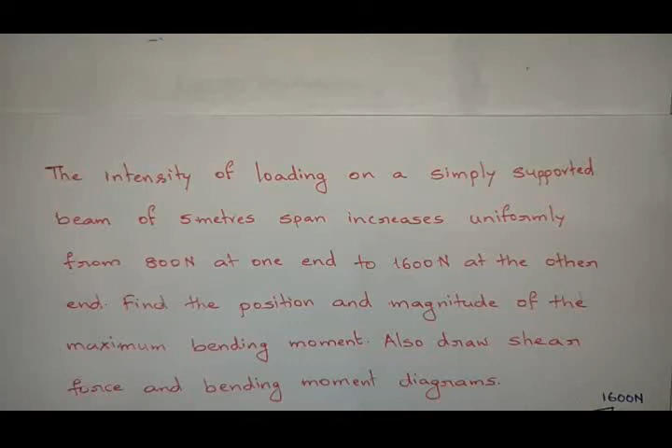Hi everyone, in this video I am going to discuss a problem on simply supported beam carrying a UDL and UVL.

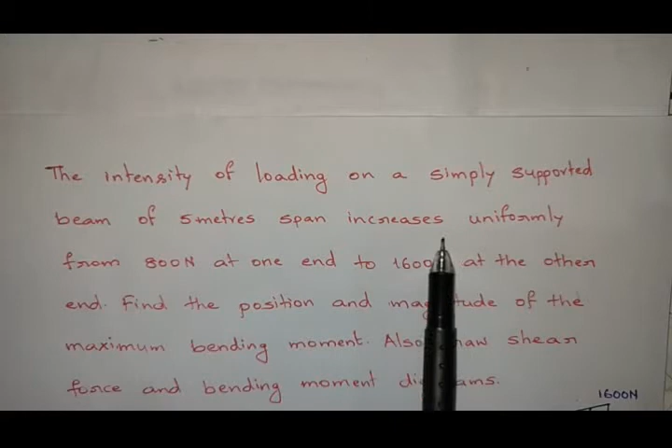The problem states: the intensity of loading on a simply supported beam of 5 meters span increases uniformly from 800 newtons at one end to 1600 newtons at the other end. Find the position and magnitude of the maximum bending moment. Also draw shear force and bending moment diagrams.

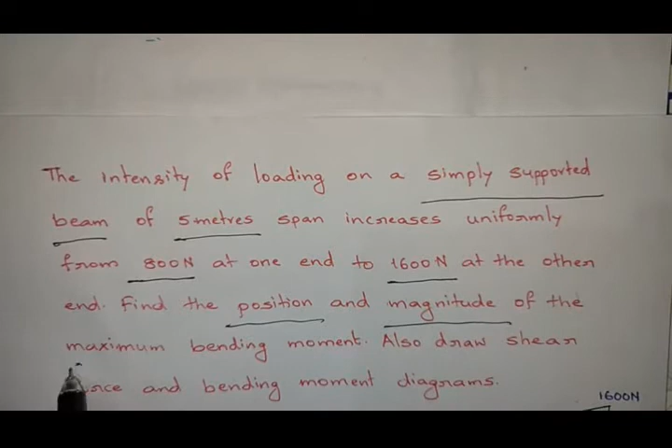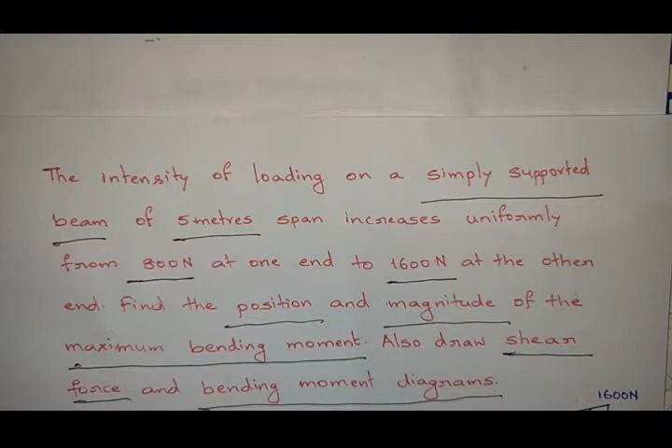Here the figure is not given, so according to that we need to draw the figure. So here I have drawn a figure, see it.

So here I have taken a simply supported beam represented in the red color. For simply supported beam two reactions are there, RA and RB.

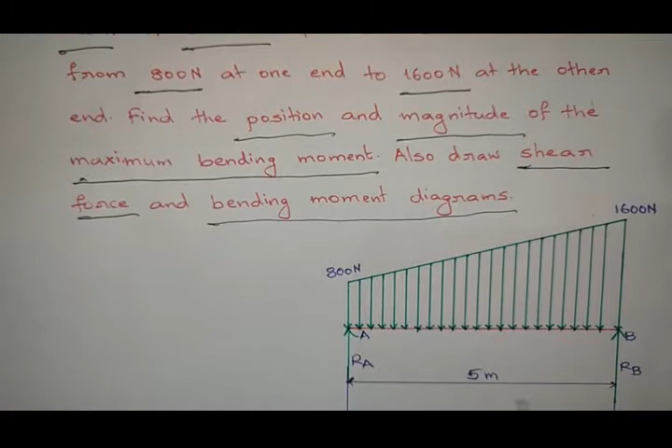The length of the beam is 5 meters. At one end, that is end A, the load is 800 newtons, and at end B it is 1600 newtons. On the left hand at one end 800 newtons and on the other end 1600 newtons of load is acting.

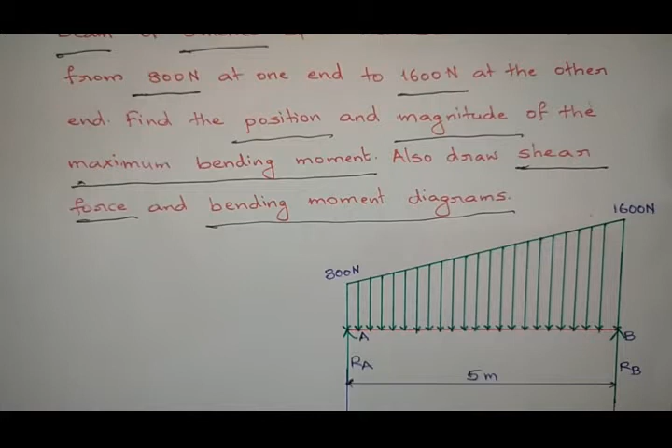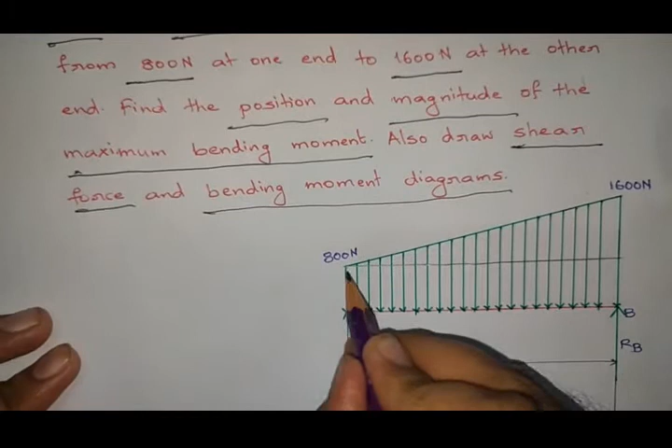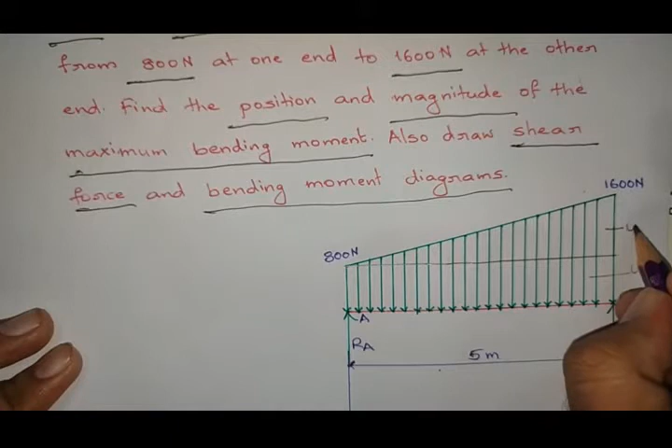Now what about this load, from here to here this portion is a UDL, and from here to here this portion is a UVL. So now the load is a combination of UDL and UVL.

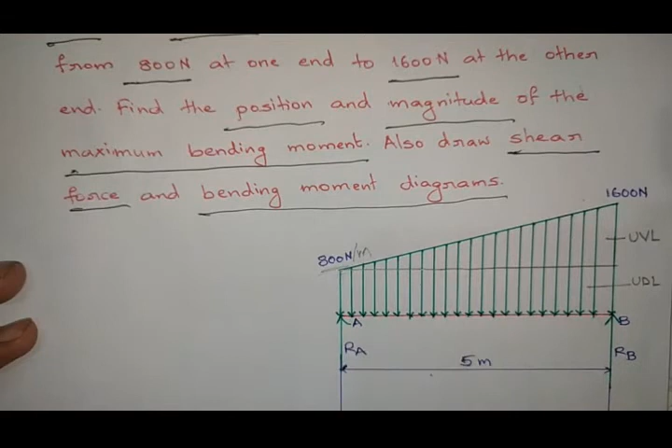So first convert UDL into a point load. What is the height of the UDL? 800 newtons per meter. That means per meter 800 newtons. For 5 meters, how much? 800 into 5, that is 4000 newtons, acting in the middle of 5 meters.

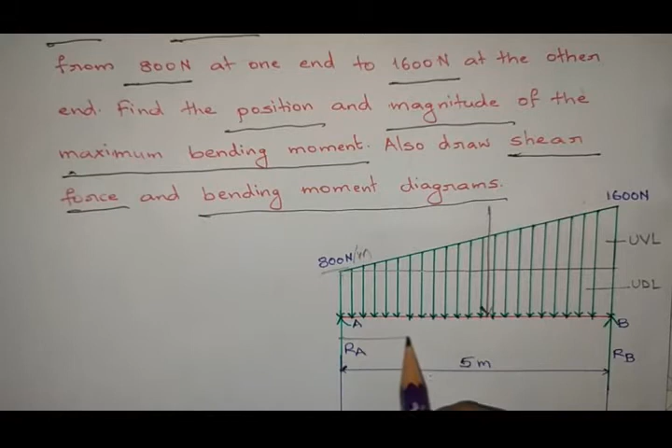This 4000 newtons acts in the middle of this 5 meters, so that is at 2.5 meters distance, and on the right side also 2.5 meters.

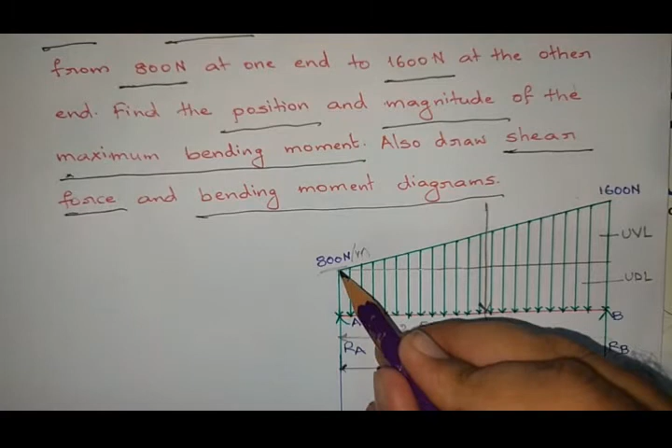Next, convert UVL into point load. Now let's convert the UVL also into a point load. On the left side the height is 0. Total is 1600, here to here is 800. Then what about this height?

800 newtons. Now what about this value? So half into base, what is base? 5 meters, into height value 800. So 400 into 5, that equals 2000 newtons.

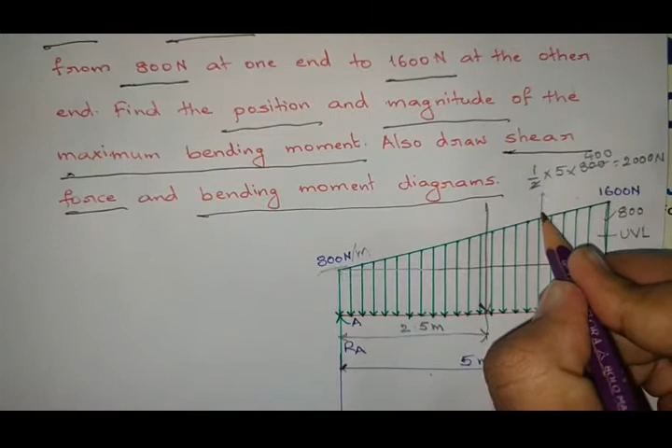So where is this 2000 newtons acting? It is acting here, at a distance of 1/3 of L. So in this 5 meters, 1/3 means 1/3 into 5, that distance from the right side it acts. So that is 5/3.

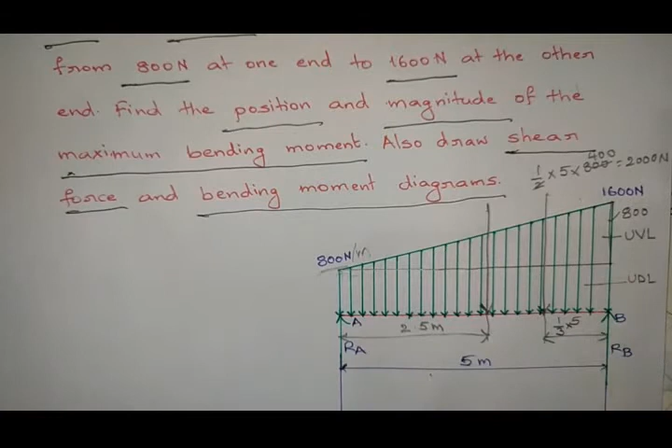So now I converted UDL into a point load, and UVL into a point load.

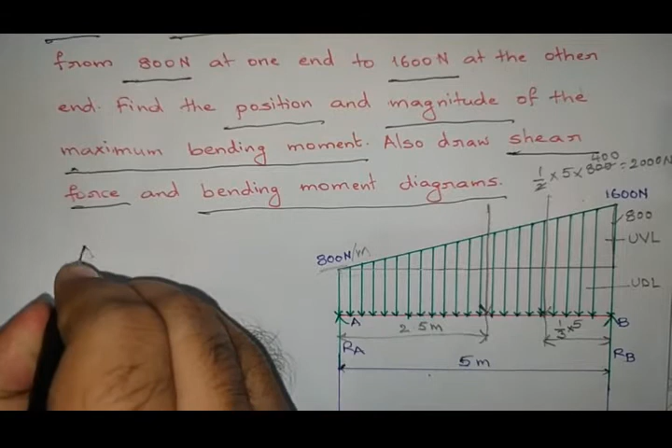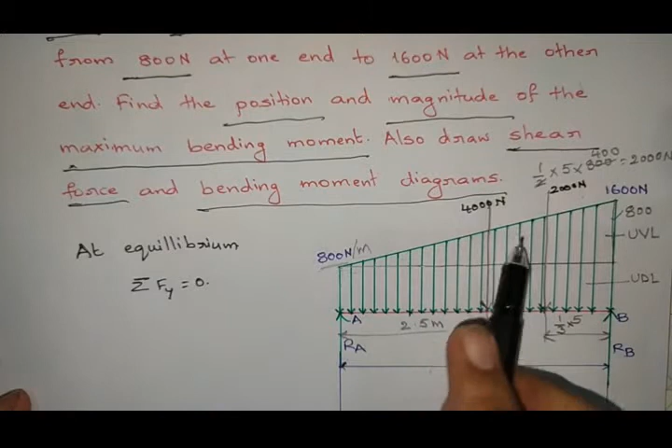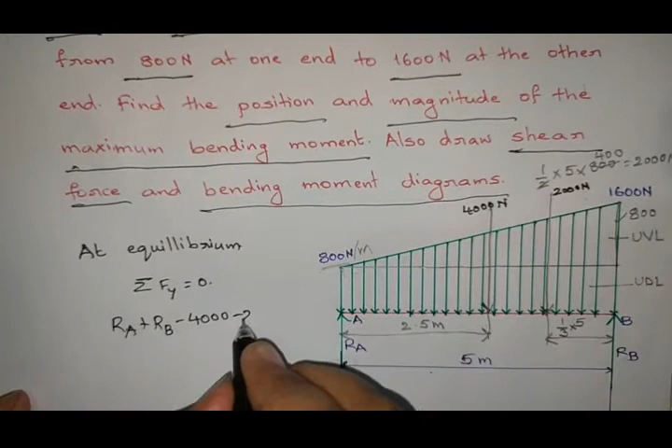So I can write RA, RB upward. Next this 4000 newtons, and this one is 2000 newtons, acting in downward direction. So RA plus RB minus 4000 minus 2000 equals 0. So RA plus RB equals 6000 newtons.

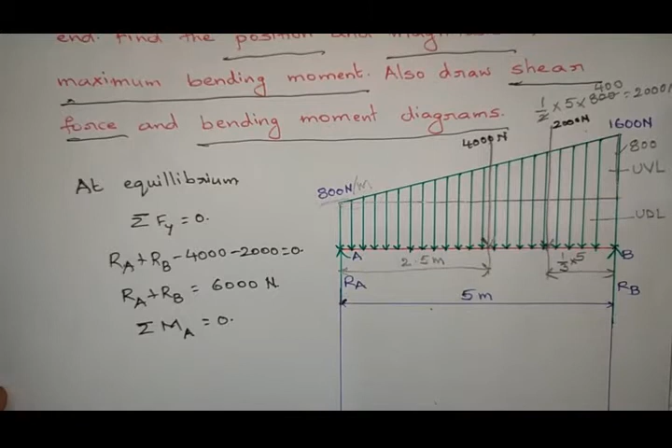Next, find the moments with respect to point A and equate it to 0. So moment due to RB into distance is RB into 5, anticlockwise moment positive.

Next, 2000 into this distance, total 5 minus 5/3, that means 10/3. So that equals 2000 into 10/3, and it is at a distance, clockwise moment minus.

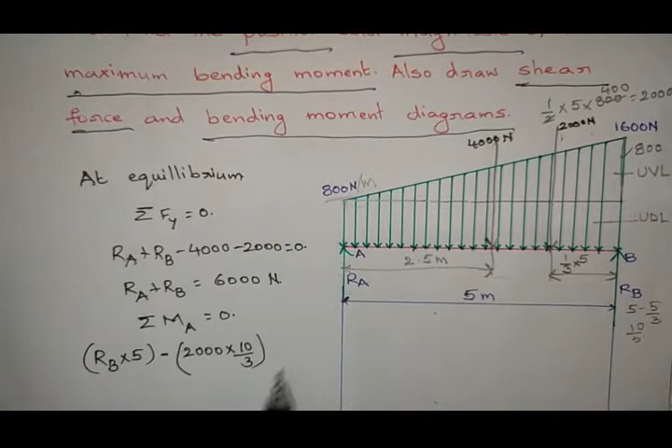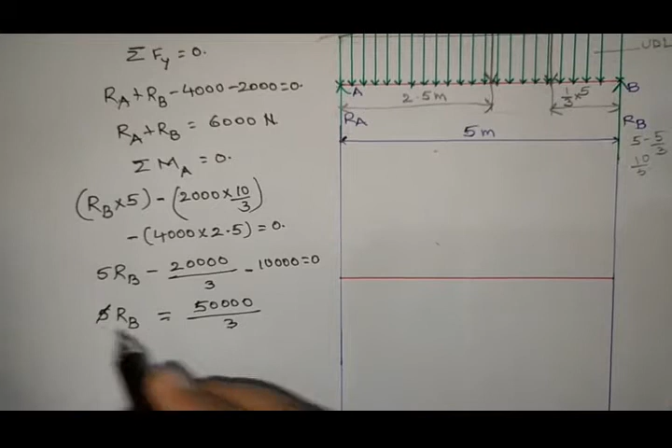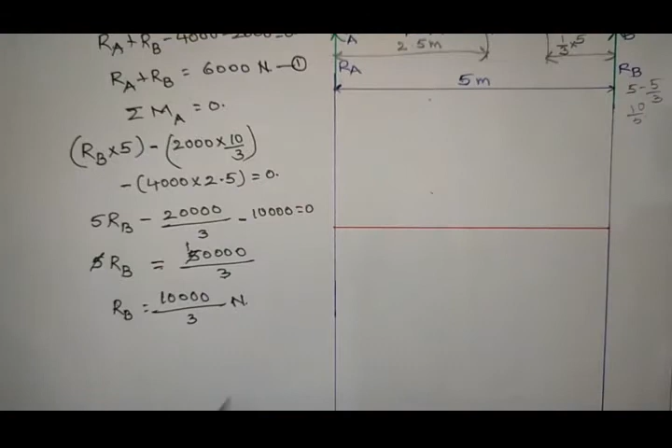Next, 4000 into 2.5 is also a clockwise moment, so minus 4000 into 2.5 equals 0. So that means 5RB minus 20,000 by 3 minus 10,000 equals 0. So 5RB equals 50,000 by 3, that equals RB equals 10,000 by 3 newtons. Now substitute RB in equation number 1. So RA equals 6000 minus 10,000 by 3, that equals 8000 by 3 newtons. So now I got RA and RB values, right?

So now calculate the shear forces. So I am going to find shear forces. Okay, so what are the shear forces values?

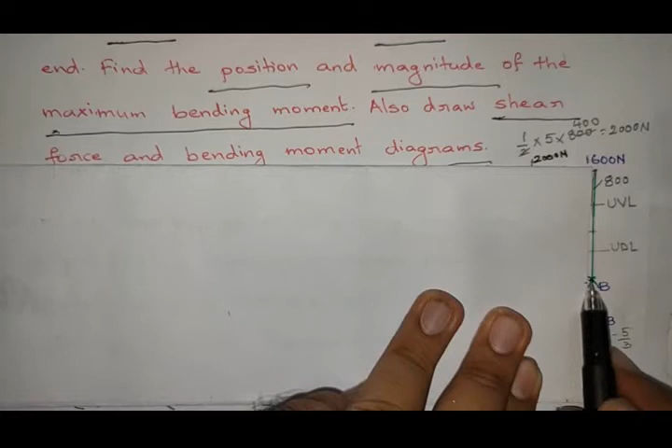Next, calculate shear force at A. So shear force at A is equals to, so what is shear force at A?

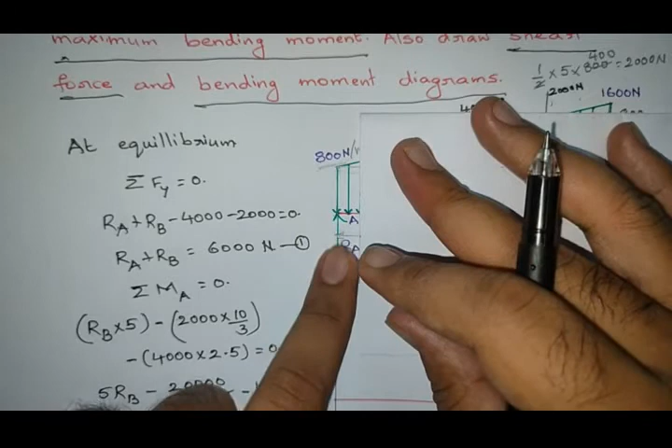So here RB is 10,000 by 3, not 8,000. RB is 10,000. Okay. Next, plus RA means 8,000 by 3 newtons.

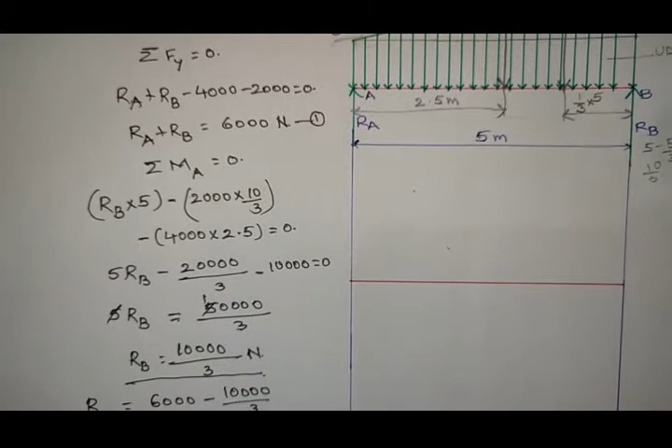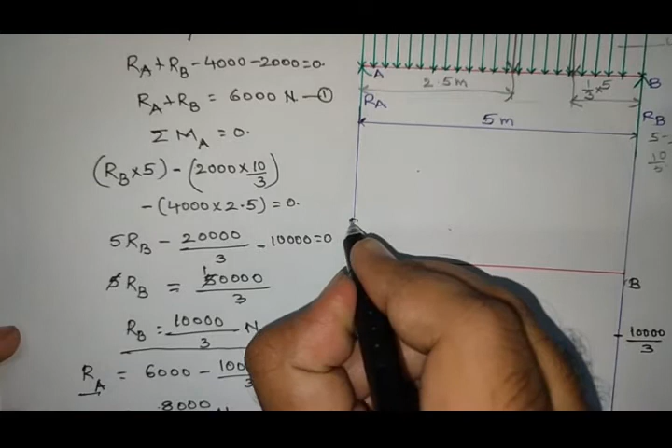Right. So now represent those values. So shear force at A and B. So shear force at B minus 10,000 by 3. So minus means below this line, 10,000 by 3. Next, shear force at A plus 8,000 by 3. So that means this value, so that is 8,000 by 3.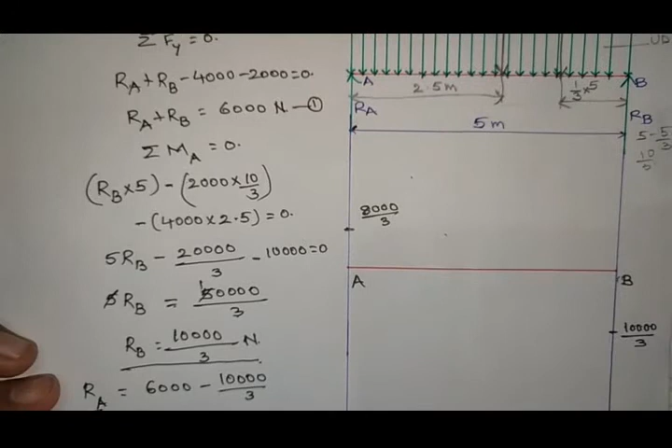Okay, so here draw a curve joining these 2 points. So it is a parabolic curve.

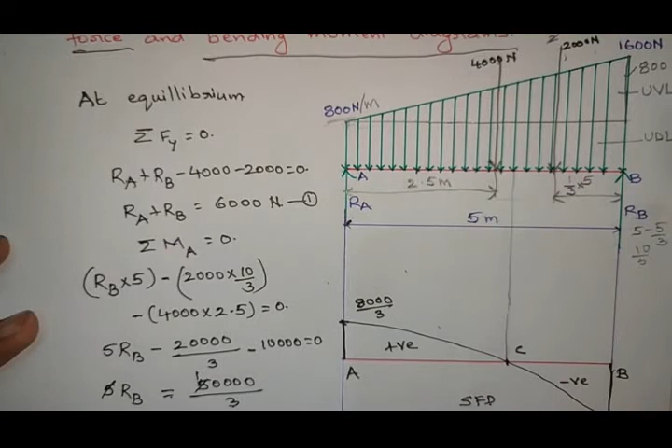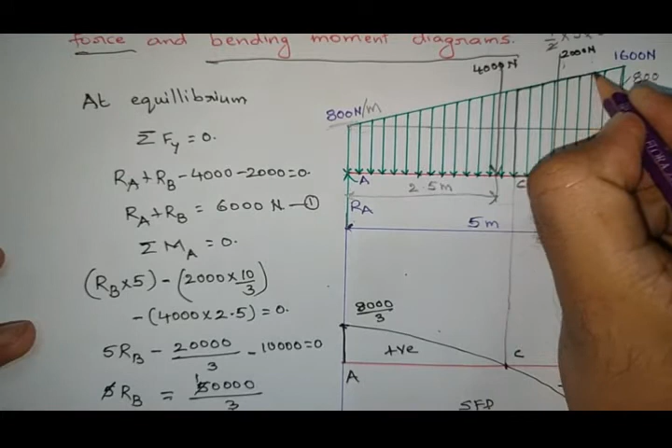Again, if you observe, so this is the shear force required for this load.

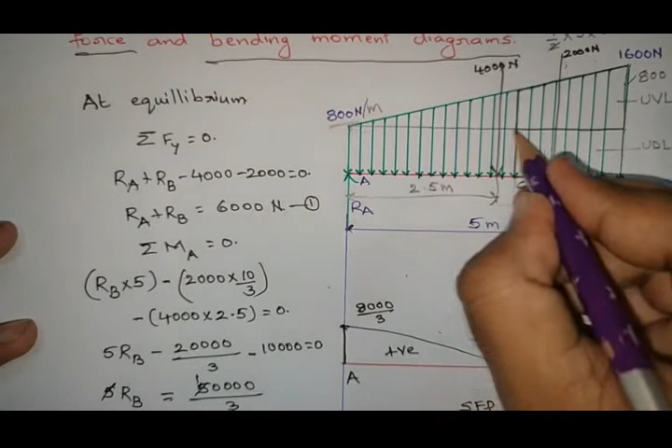Okay, so now you divide this load. So this one is UDL and this one is UVL. Okay, so here if you observe, this one is a UDL, I can calculate. But here this UVL I can't calculate because this is not a right angle triangle, right?

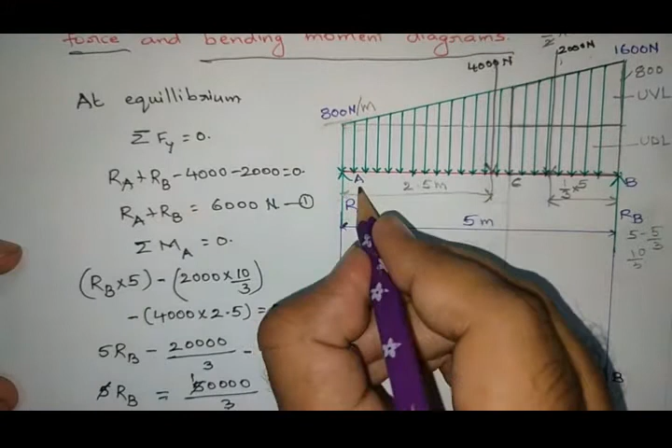So that's why I am going to find the shear force at section C on the left side. So how we are going to calculate the shear force at A, like that I am going to calculate the shear force at C.

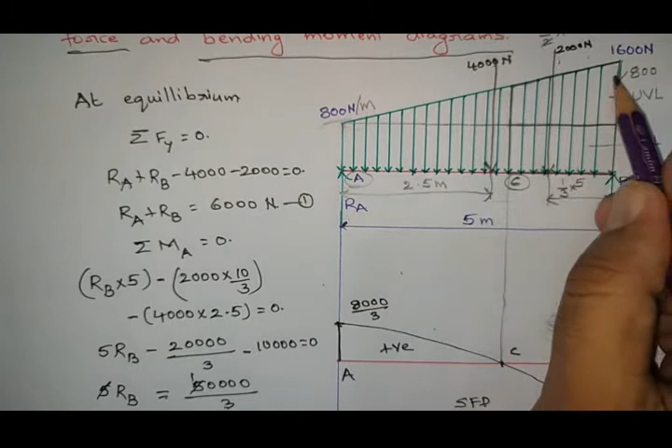So for that purpose, I am going to take this point as D, and this point as E, and this point as F. Okay, so now see here ACDF, one rectangle, FDE, it is a triangle.

So I can able to find the area. Okay, so now...

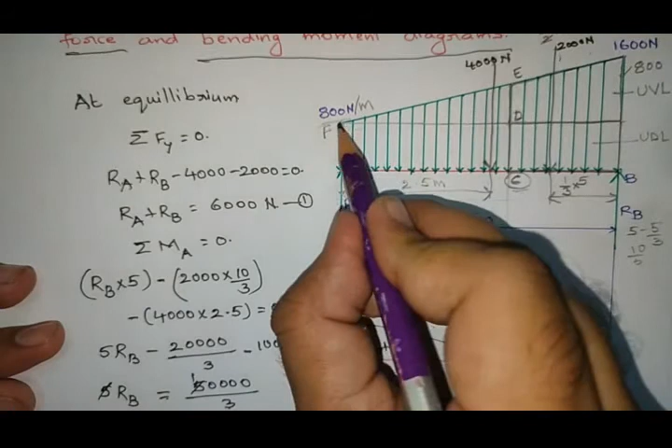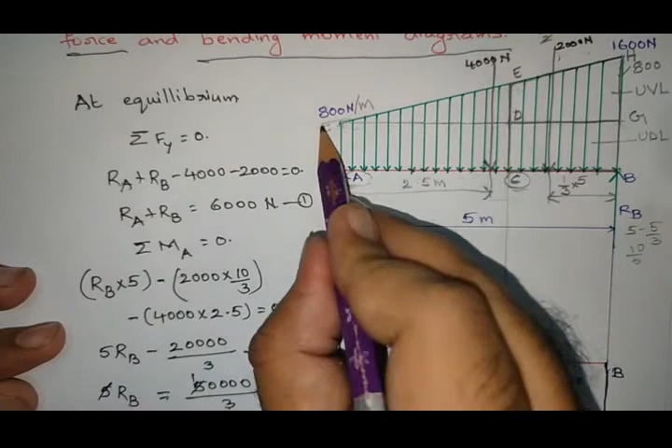Use the similar triangles. F, take it as G, take it as H. Triangle FGH is one triangle, triangle FDE is another triangle.

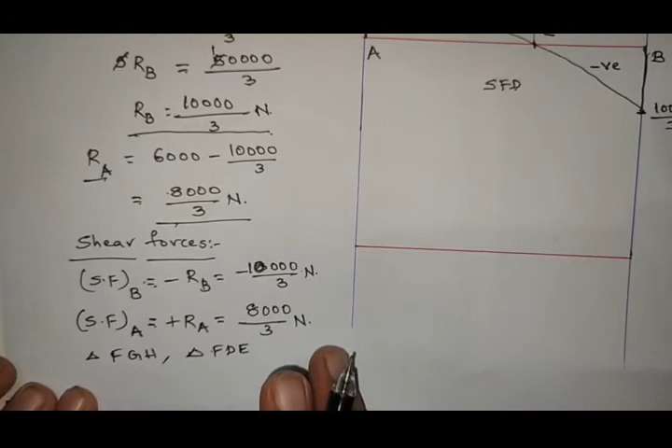So now take those triangle FGH and triangle FDE. So now apply the similarity. Then FG by GH is equals to FD by DE.

So that implies FG 5 by GH 800 is equals to FD 2.5 by DE. I require that, so DE equals 2.5 into 800 by 5. So that equals 800 into 2.5, 2000 by 5. That equals 400 newtons.

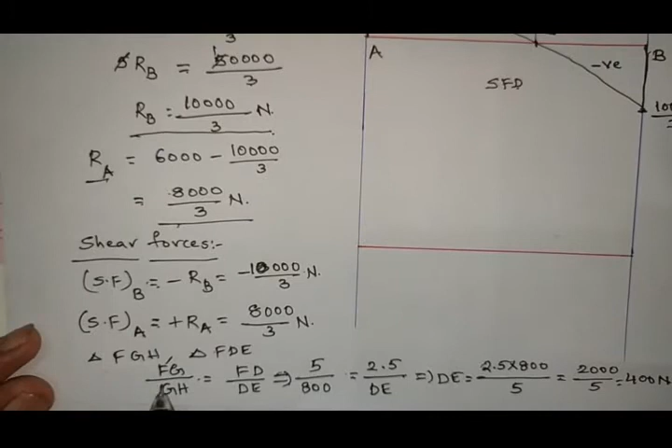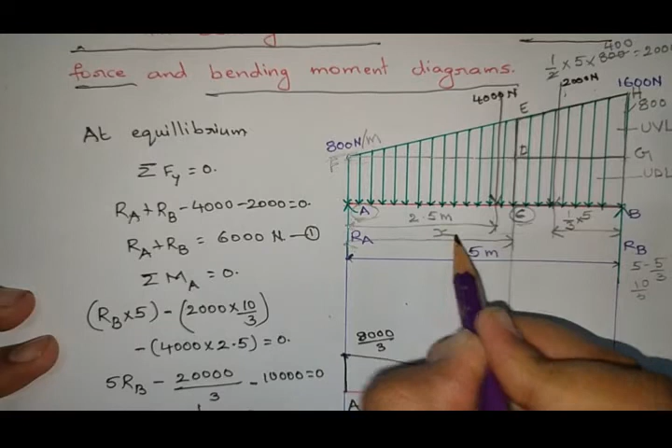The entire thing is wrong. So here if you apply this, FG by GH equals FD by DE. Let us say this portion is at a distance of x, this portion is at a distance of x. Then FD equals x, right?

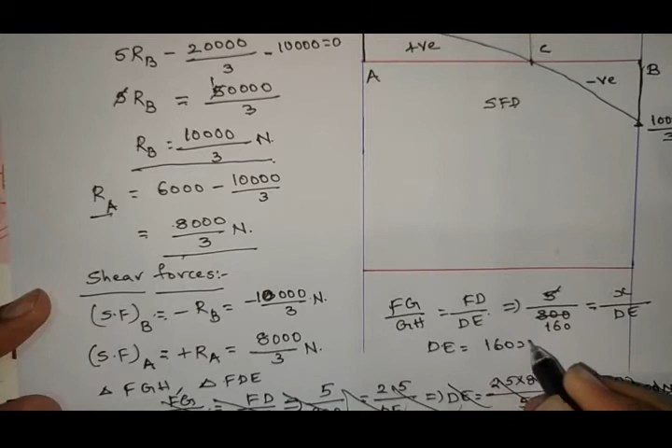So now substitute the values. FG is 5, GH is 800, that equals FD x by DE. Now what is DE? DE is equals to 5 by 160, so DE equals 160 into x. So what is the value of this DE? It is equals to 160 into x, right? So now calculate the shear force at this portion.

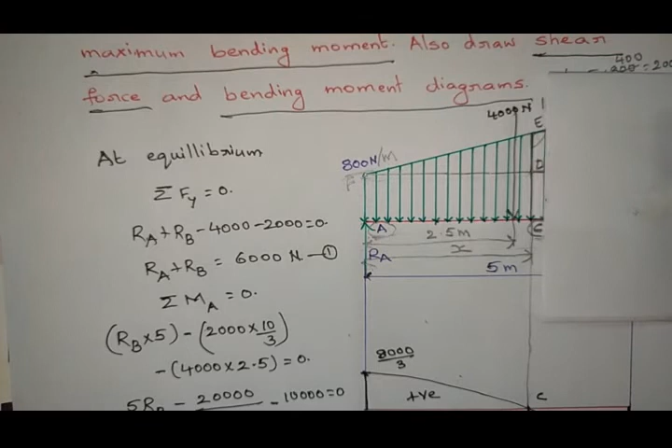So for that purpose, I am closing right side of this DE. So now point C's right side entirely I am closing. So now what are the forces acting? 1 UDL and 1 UVL, right?

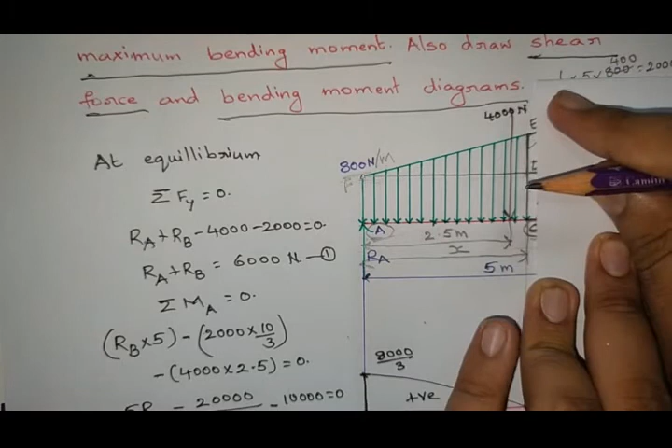So now convert this UDL and UVL. For your understanding purpose I am erasing all of this, okay, just for a minute. So now I am going to find the UDL. So what is this UDL? Height is 800 and this distance is x, right?

So now I require that x value only. So what is that UDL value? 800 into x, which is acting at a distance of the center, that means at x by 2. So at a distance of x by 2, this 800 into x is acting, right?

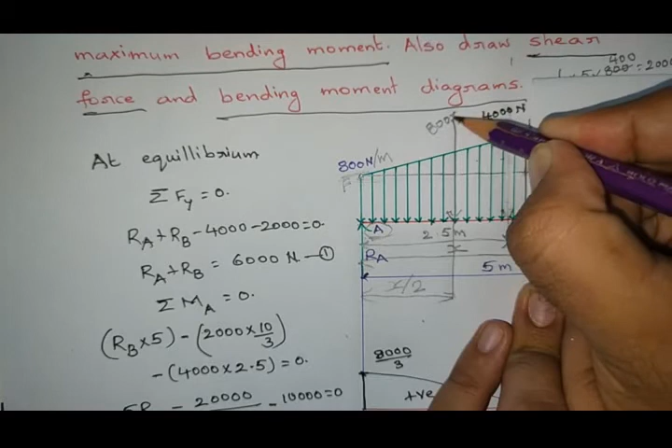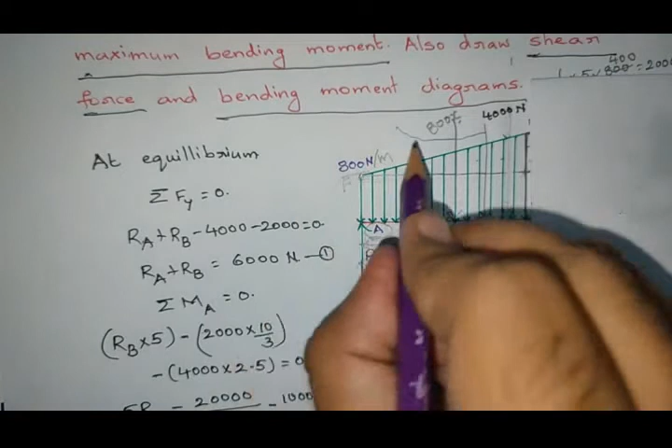Next see this UVL. So this height 160x I got and this distance is x. So now what is the point load? If we convert that UVL into a point load, then what is that value? That value will be half into base x and the height value 160x. So that equals 80x square, right?

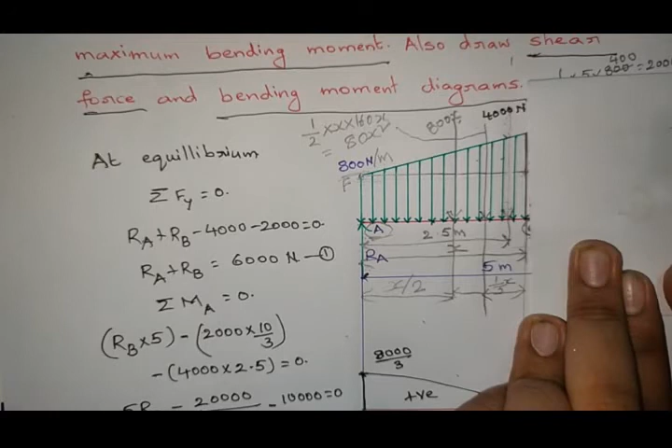So that 80x square is acting at a distance of 1/3 of x from the height of the triangle, right? So now what are the forces we need to consider? This one and this one.

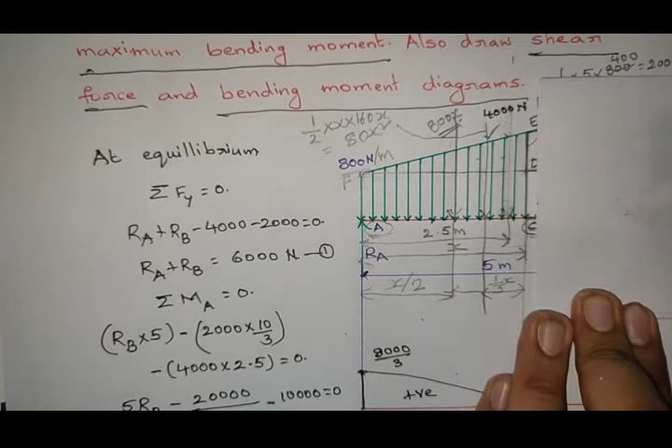Okay, so now write the shear force at C. Shear force at C means left side of forces RA plus 800 into x, that is minus, next here 80x square, that is also minus. So now calculate shear force at C equals RA minus 800x minus 80x square.

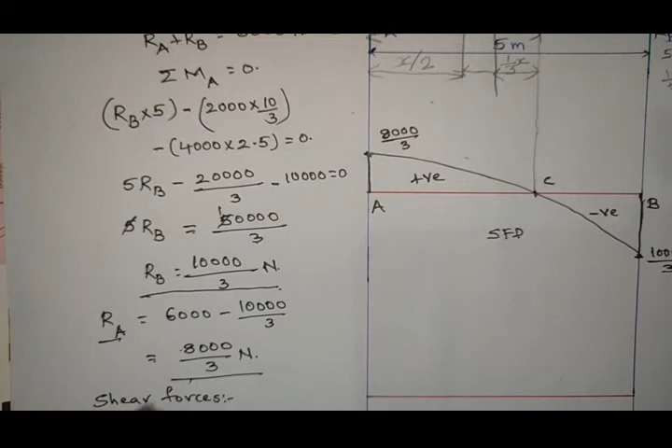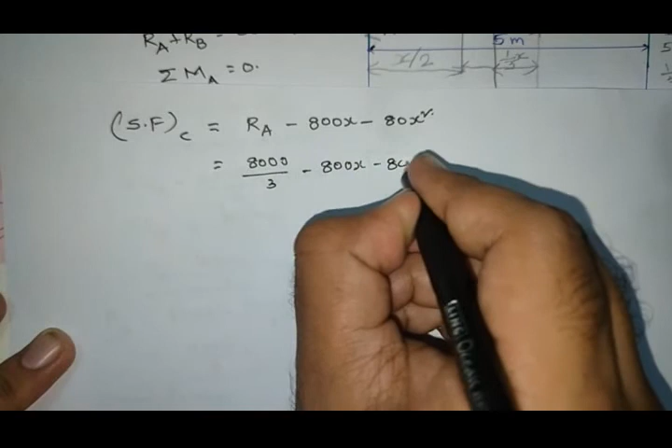So RA value is how much? RA is equals to how much I got? 8000 by 3. So now substitute: 8000 by 3 minus 800x minus 80x square. But this value equals 0. So what is the shear force at C? 0. So that's why I equated it to 0. So if you solve this expression, you will get x value as 2.637 meters, right? So that means this x value is equals to 2.637 meters.

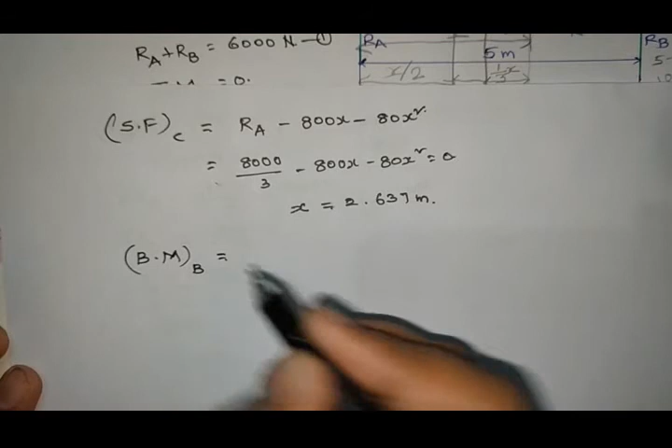Okay, so now find the bending moments. Bending moment at B is equals to, so what is bending moment at B? Now close the left side of B. Then what are the forces acting to the left side of B? Only RB is acting, so but it is acting at point B, so that's why bending moment at B equals to 0. Next, what is bending moment at A?

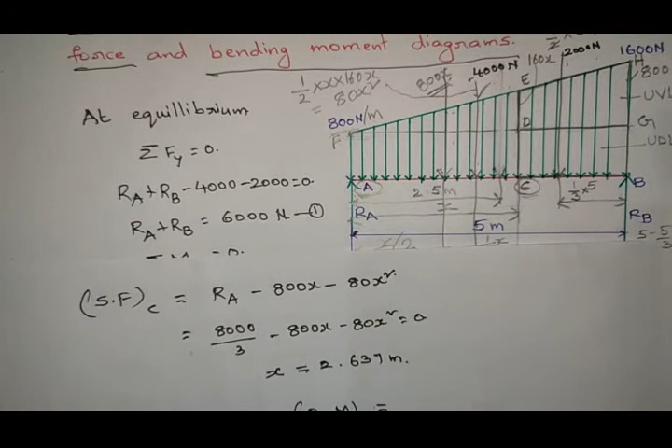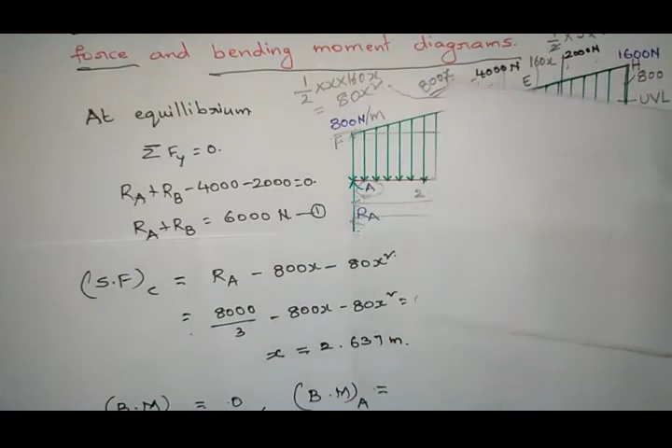So bending moment at A is equals to, so now close the right side of the A. So if you close right side of the A, then what is the bending moment? So point A and RA are at same place, so distance is 0. So that's why bending moment at A is also 0.

Next, calculate bending moment at point C. So just like here I am going to find. So how to find that one? So just I am closing the right side of C. Calculate the loads. So what are the loads are there? RA into x meters, next 800x into that is distance of x by 2, right?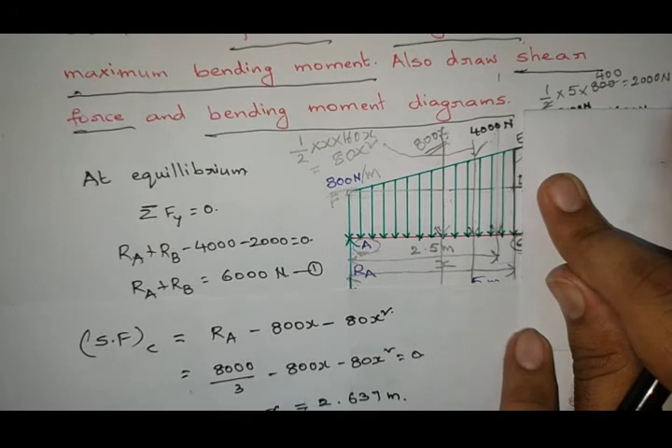It is acting in the middle, so that's why total is x, in the middle means x by 2, 800x into x by 2. Next here if you see 800x into x by 2, if it is x by 2 means this one also x by 2. Next here 80x square, it is acting at a distance of x by 3, right?

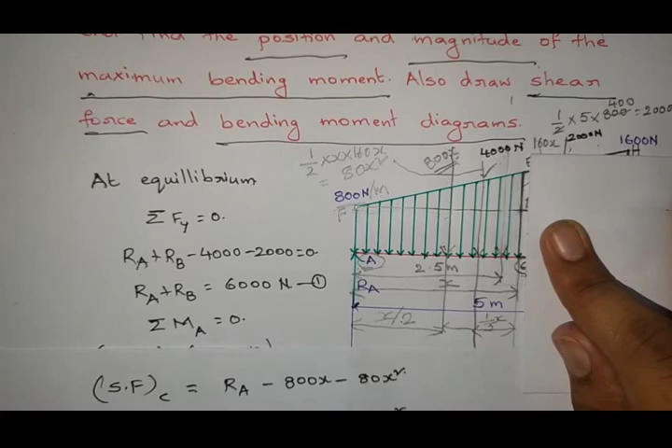So now substitute RA into x, so it is clockwise moment plus in this case. Next 800x into x by 2, it is anti-clockwise moment, so minus. Next 80x square into x by 3, so it is also anti-clockwise moment with respect to point C, minus.

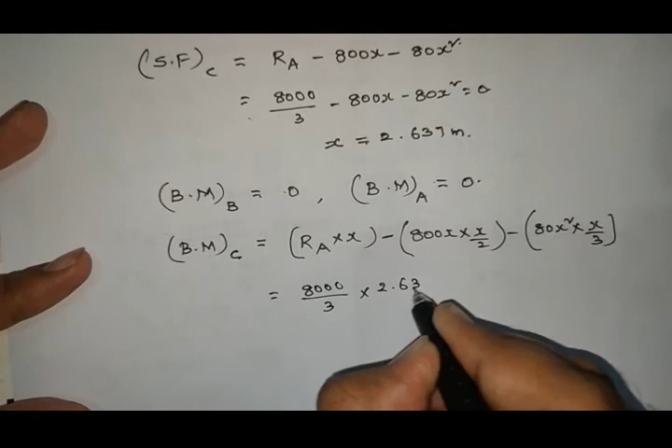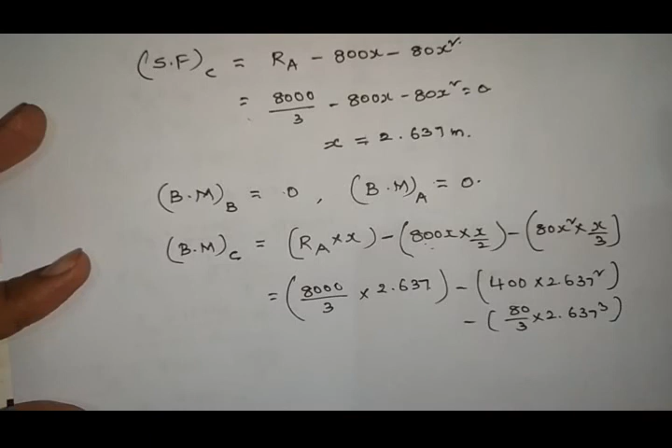Now substitute x equal to 2.637, so that equals RA value 8000 by 3 into 2.637 minus 800x, 400x square, so 400 into 2.637 square, minus 80 by 3 into x cube into 2.637 cube. So if you solve this value, you will get it as 3761.51 Newton meter, right?

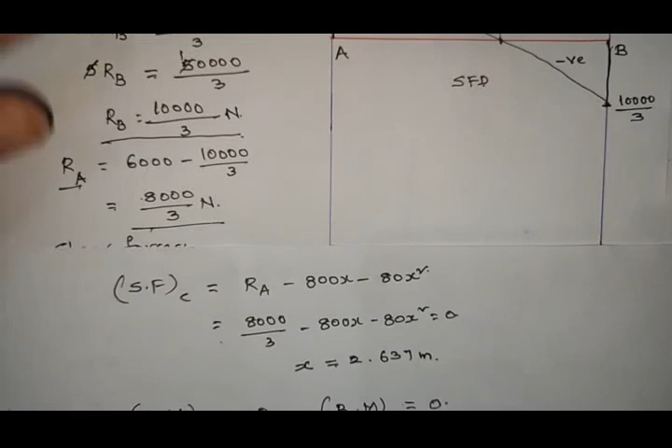Now represent the bending moments. So here bending moment at A and B, and now this one is point C. So bending moment at B is 0, bending moment at A is 0, bending moment at C is 3761.51. So now draw the curves joining these.

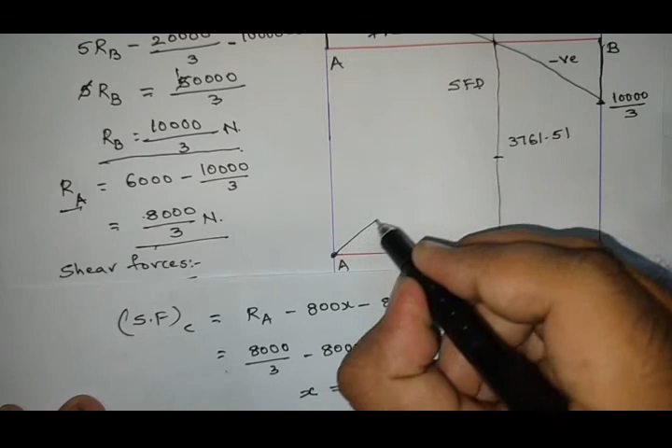So these are cubical curves, right? So now this one is the bending moment, right? Positive. So like this we need to draw the diagram and solve the problems, right?